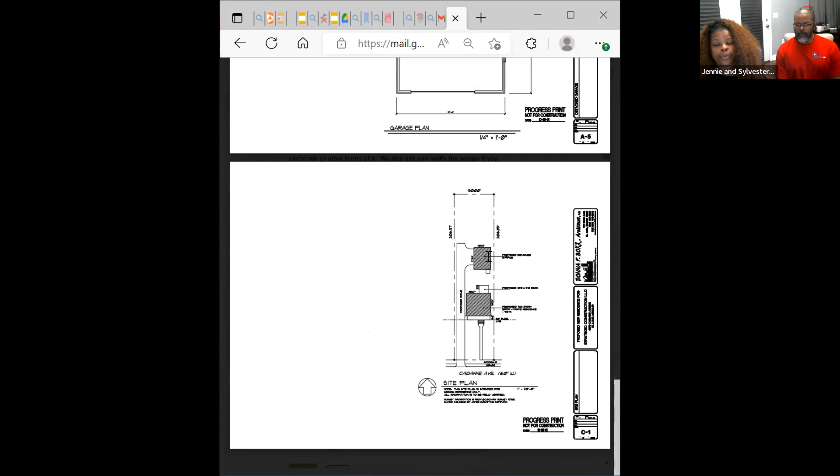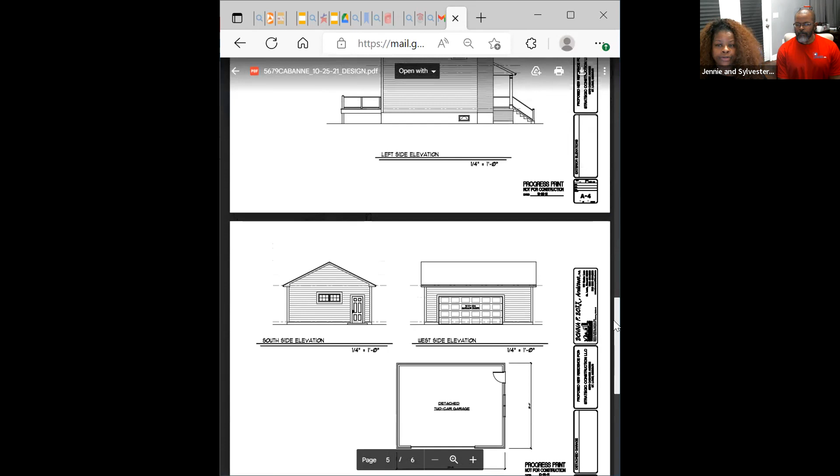Some of the changes from the original plan: we initially had a front garage, we just closed that off. We kept the interior the same, and we detached the garage and moved it to the back, so it'll be a back entry garage. So here's the front here. We moved the garage from the front with the side drive. We did it detached, but it's still an option to be attached. We did the sidewalk to the house, which was one of the requests. You can see that. It can be a side entry garage attached on the back, either or. It's the buyer's option.

Here's one of the elevations that we chose, just a simple wide porch, all 9-foot ceilings. We're doing all brick on the front now versus before we had some siding. This particular one has dormers.

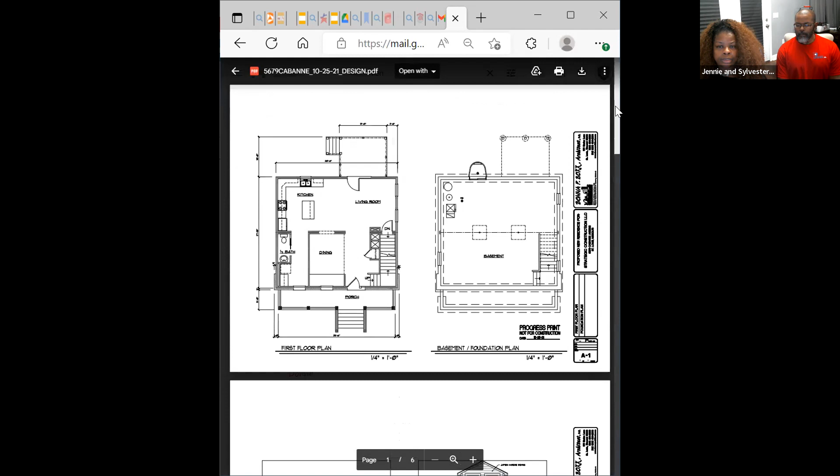Let me see if this is the right one. I'm sorry, I got another, one second. We have another plan, I apologize for not bringing it. I'm sorry, I would have been better prepared. I didn't think that, but I should have known better.

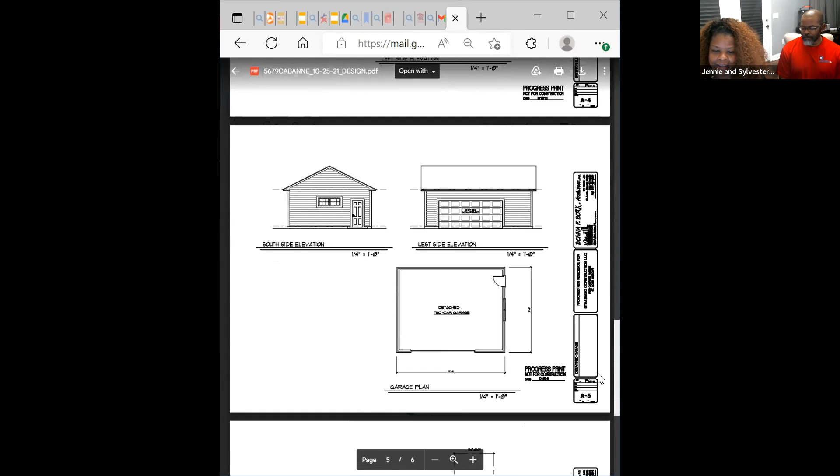Why don't we, since it's been a while, if you don't mind, give us a little overview on the very basics. So how many houses are you wanting to build? Talk a little bit about the phasing. If I remember correctly, you all wanted to use, was it some prefab units or a different type of construction?

There's 7 lots. Initially we want to start with 4. We still want to use the modular construction. For the corner lot, the second phase, we haven't done the design on those yet, but we wanted some input because it's a much bigger lot, so those houses were kind of drowning in it. We were thinking maybe a Cape Cod, or maybe some attached villas or townhomes or row houses. The corner lot is like 73 wide. Before we got too involved in it, we wanted to get your input. But initially, it's 4 lots that we want to start on.

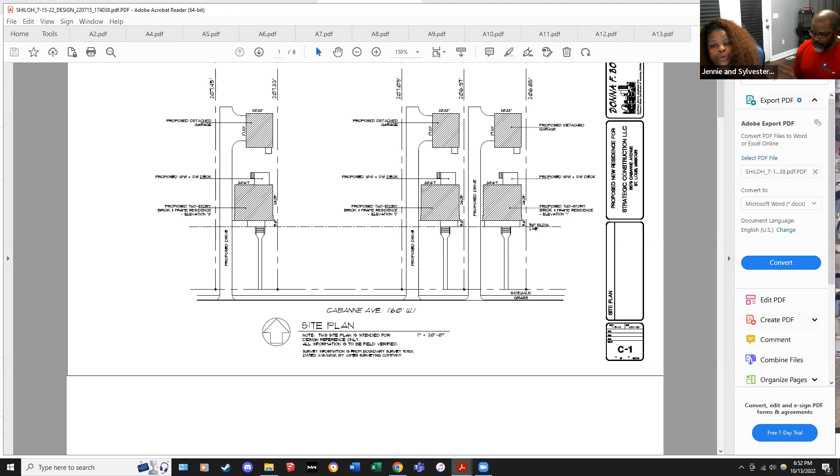Yes. The way modular works -- Sylvester can probably explain it better -- it's stick built. It's considered a regular house, it's just a means of building. You can get an FHA loan, conventional, once it's on foundation it's a house. The biggest difference with modular construction is it's the same construction that's built on site, the only difference is it's built off site in a climate controlled environment.

So say for instance there's a day where the trades are building a house on site and it starts to rain or snow. Typically with modular construction, everything is built inside a factory where there's climate control, no off times, no off days because it's raining or snowing or too cold. Also, labor is a lot more proficient because these guys have scheduled breaks, scheduled lunches, and the assembly is always being done, always in process.

Even out on job sites where you've got union or non-union carpenters -- I'm not going to get into union, I've been in the union -- inside the factory everything is very strategic, very organized, very efficient. The assembly line is moving and each skilled trade is doing their part on that line, building the house. The house isn't built any different, same components, same materials, everything's the same. The only difference is it's built in a climate controlled environment and everything moves a lot more efficiently than out on the job site.

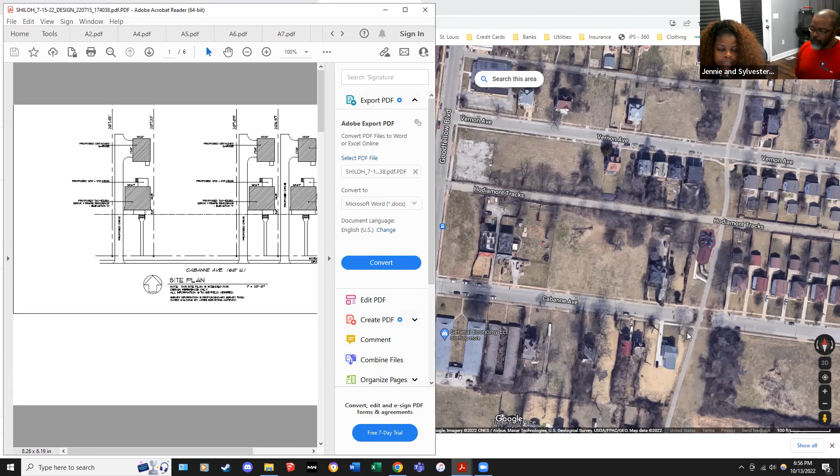Okay, very good, thank you. What are the addresses of the 4 lots that you want to start on? 5679 is one of them, 5719 is another. Ours would be 5713 -- our personal house would be 5713. And then 57... So looking at the pictures, it's pretty much on the Cabanne side.

It's the 4 lots that are next to each other. It's pinpointed at 5713. 5679 is the first one, then 5703, 5713, and 5719.

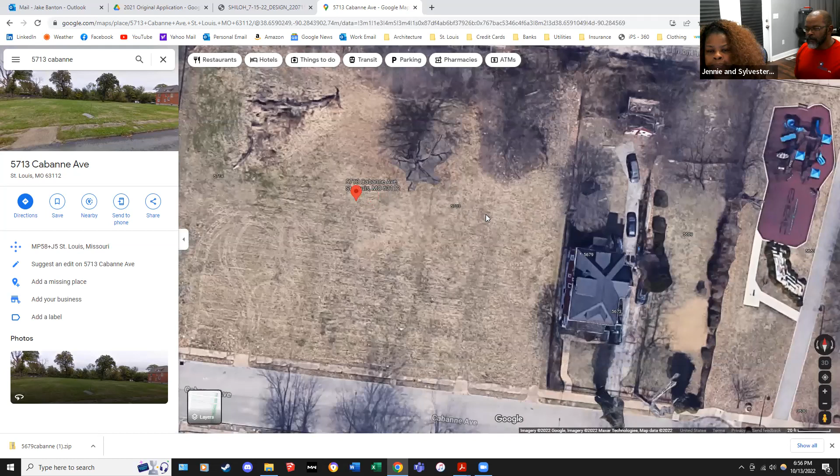When you mentioned corner lots, what are the addresses of the corner lots you were referring to? 5741 is the corner lot. That's the one we've been going back and forth on. It actually has 2 addresses because it used to be an apartment building. It was 5741 Cabanne, and I believe it's 910 Goodfellow.

One of the things we were thinking about doing, since it's not really an apartment building, was maybe a couple of townhouses, and deciding whether to turn it towards Goodfellow Boulevard. We were thinking of maybe 2 attached homes, or some sort of villa type or row houses. We also thought about putting our office on the back end of the lot, maybe a community space with computers or access, since the lot is big enough to split up. So that lot is still undecided because of its size and location right on Goodfellow.

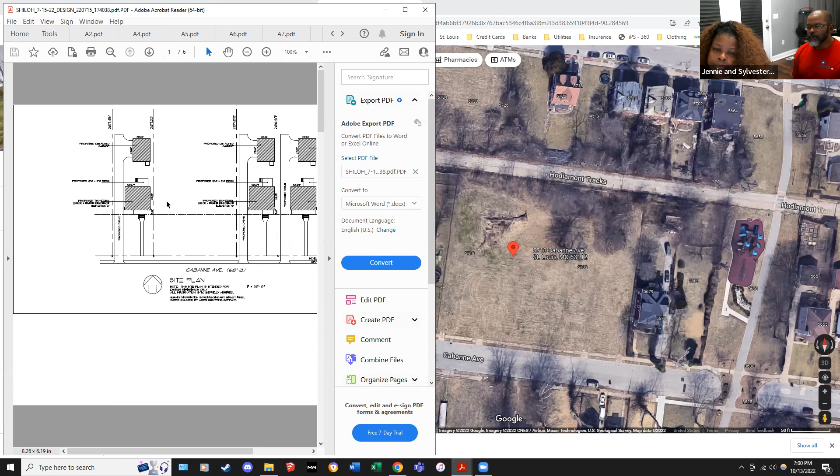I want to review the changes you made for these 3 homes that differ from your original submission. I think the main thing was before, you had been showing those garages attached on the front corner, and that has now been moved to the back. I understand they could also potentially be attached on the back side, but the back side is what's important, so I think that's a good change.

This 50-foot building line here, is that in line with these current buildings? I think this one is a little hard to tell—that might be a little closer. But is that currently the same building line as these 2 buildings on the street? I think that would be the setback from the house to the right, the single house on the end. So that 50-foot line would be the setback, which would line up with the front of that house on the end. Okay, so it would line up with this one.

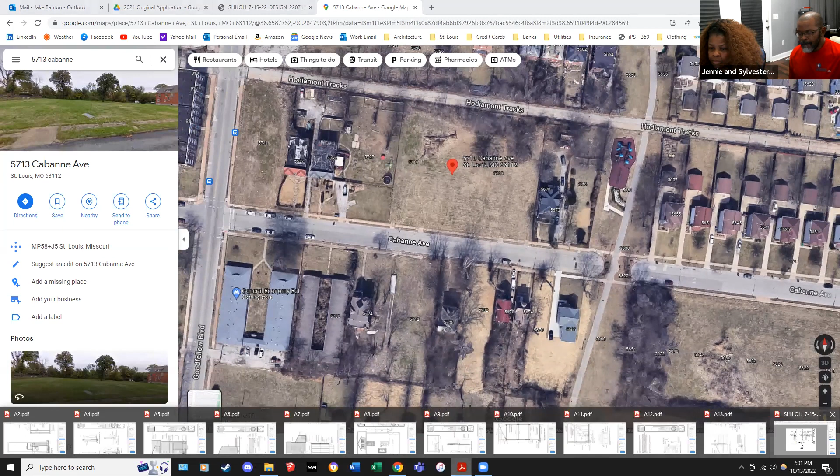And then we asked for the front walks up to the sidewalk, which I see you guys included in this plan. We won't get into the floor plans too much.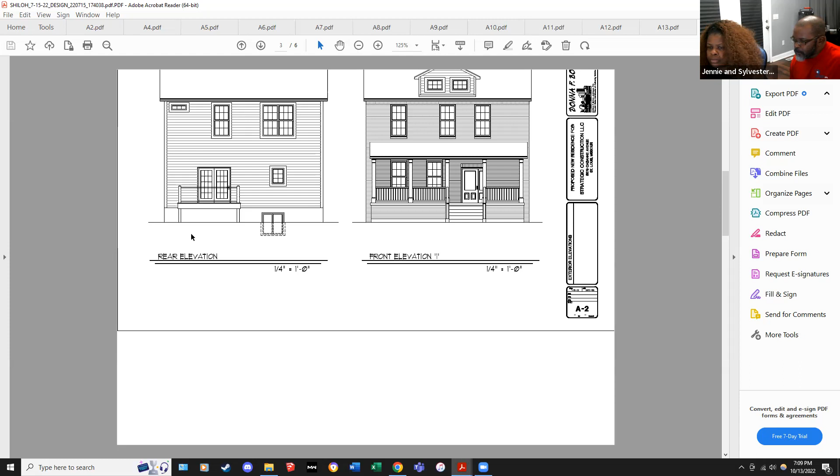And then I had a question about some of the interior space, as far as finishing it out on the interior. Would the first floor be hardwood floor, or what's the plan for the flooring? What's the plan for the countertops? Some of those finished items on the interior - can you provide us any detail about that?

The flooring - I think we're looking at, because now the new thing is the vinyl plank flooring, the luxury vinyl. That's kind of been a big thing right now. Basic hardwood, with carpets in the bedrooms.

For the countertops, we have someone that works with us who does design. The base trim is going to be tall base trim, because we want to mimic the old houses. We like those panel, 5 or 6 panel doors that mimic the old houses, but they're the new style. For options, we may do one with a nice Formica countertop, or quartz - I kind of like quartz right now. So it may be variations, because none of them are going to be the same.

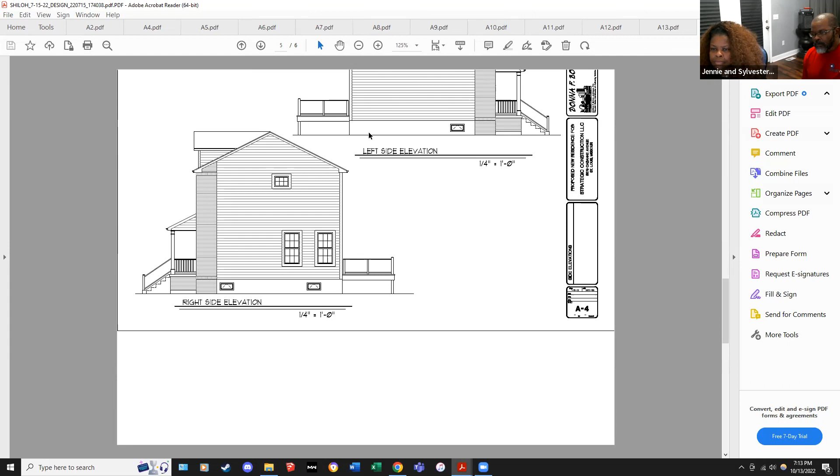Windows are important. For instance, that elevation there - I think I saw another elevation where I only saw one window. Roll to the one at the top and see what the left side elevation is. Unfortunately it's cut off, so I can't scroll up.

But anyway, those are just suggestions, and a lot of it is still optional. One of the things we like at the front - we have two windows, one for the dining room, which will be a nice sized window. There's one next to the dining room, behind which is the laundry area and a half bath - there's a window there. There's the patio door with double doors that has a lot of light. We have a window over the kitchen sink, and then two in the living area.

I believe we have windows in both bathrooms upstairs, and all the bedrooms do have windows. The buyers do have the option to add additional windows if that's what they choose, and we can accommodate that.

Sylvester's a little more in tune to making sure there's light. Me personally, I like a lot of windows, I like a lot of light, but obviously on a development like this we have to watch the budget. We have to make sure we're cost conscious of what we can spend and how we build these.

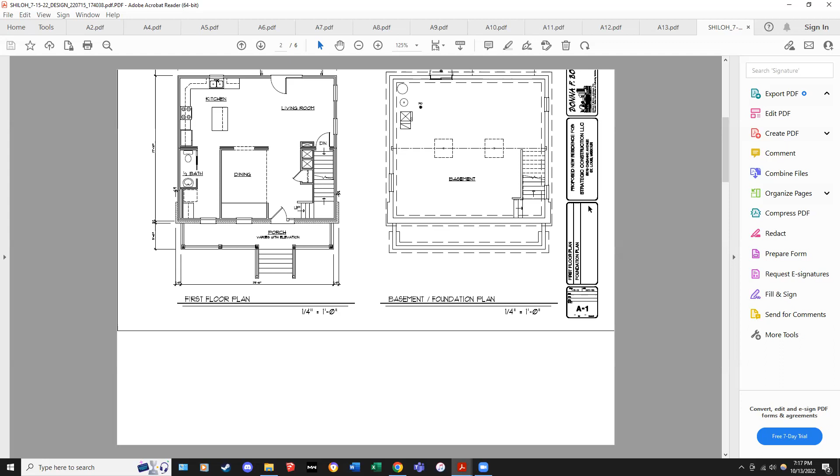And that's the only reason why they have a window over the kitchen sink. And as a mother, I have watched my children play in the backyard as I wash dishes. But I also looked at gardens and just the light, something to do instead of staring at a blank wall. I personally like to watch squirrels out the window in the morning.

You'll have plenty of those in this neighborhood, I can assure you. It is, and we have a squirrel whisperer. Our son loves animals and they just flock to him. So he likes the squirrels, the raccoons, and the rabbits.

Hey Sylvester and Jennie, what's your price point for these houses? Assuming just sort of your base model with no added customization, what's the price point you're hoping to hit? It's increased a lot with the material cost, so right now a base is probably going to be about $350.

One of the things we also wanted to talk about is possibly the CDA has some money available for gap funding. So we were thinking about applying this month. We kind of started it, but I believe we also need support from the community if we do apply for it.

And if CDA is involved, windows are going to be a must. And if CDA is involved, if we continue to go forward with our changes, you're going to have to consider putting in a basement egress. Well, it has been. Yeah, we're absolutely going to put that basement egress. Okay, yeah, it has been, it's on the plan.

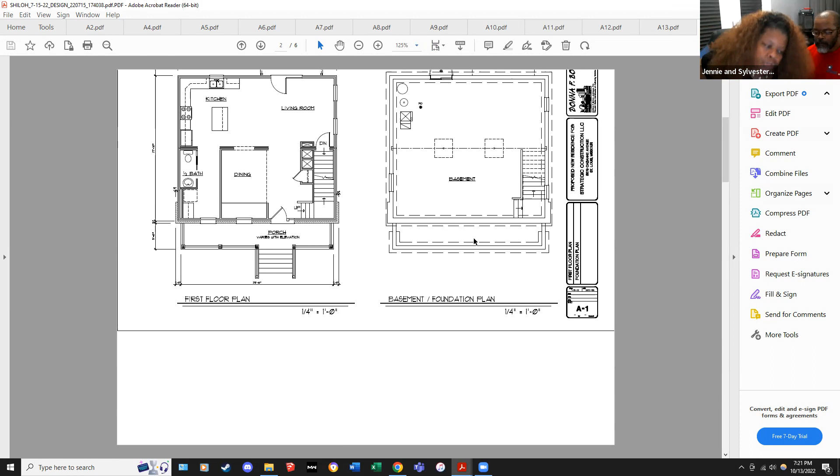Let me see, well I could pull up a picture. Initially it was just questions. We were thinking about the corner lots, because we want to start planning for the rest of the lots. With our house, let me see if I can pull up a picture.

A Cape Cod. One second, let me pull one up. We want a first floor master, we were trying to get it. I don't know if you're familiar with the Cape Cod style? Yes, okay let me. Okay. Of course.